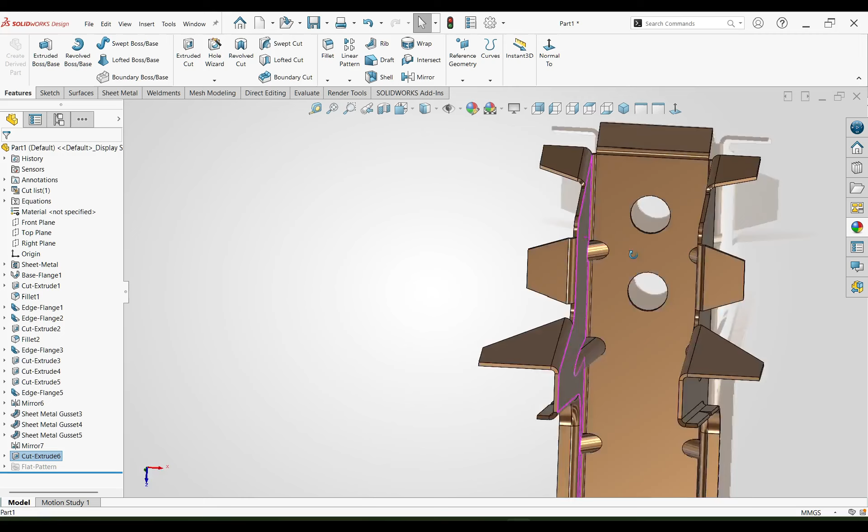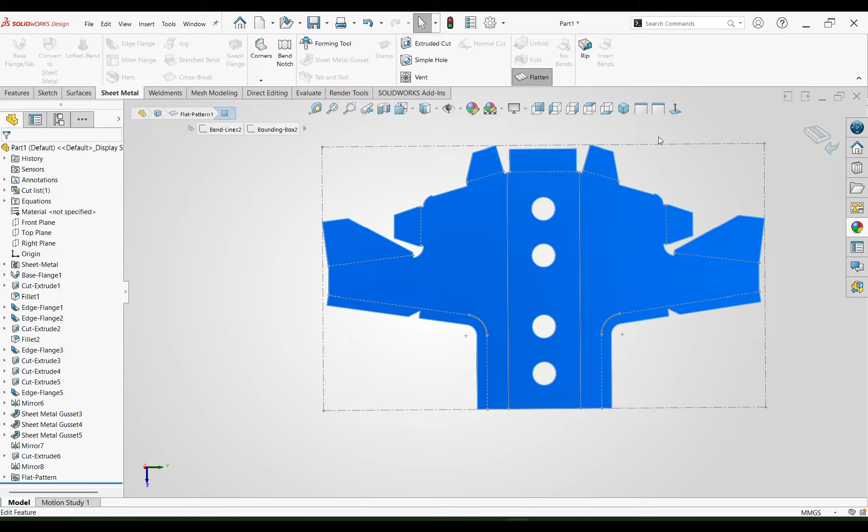In today's SolidWorks tutorial, we are going to design this powerful sheet metal mounting bracket step by step using different sheet metal features like base flange, edge flange and so on. This model looks clean, professional, and it's perfect for practicing real industrial sheet metal design workflow inside SolidWorks.

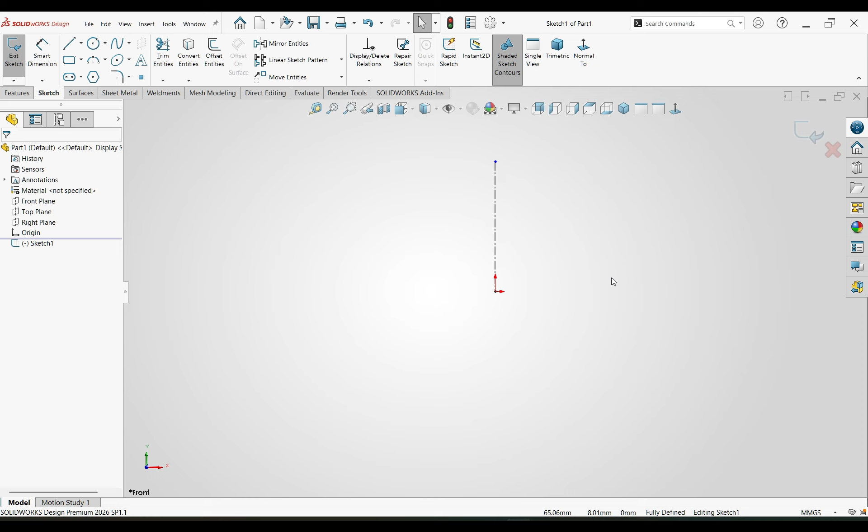Now we will select the front plane. I'm going to use center line, vertical, and make a horizontal line and vertical line. Horizontal will be 30 and vertical will be 150.

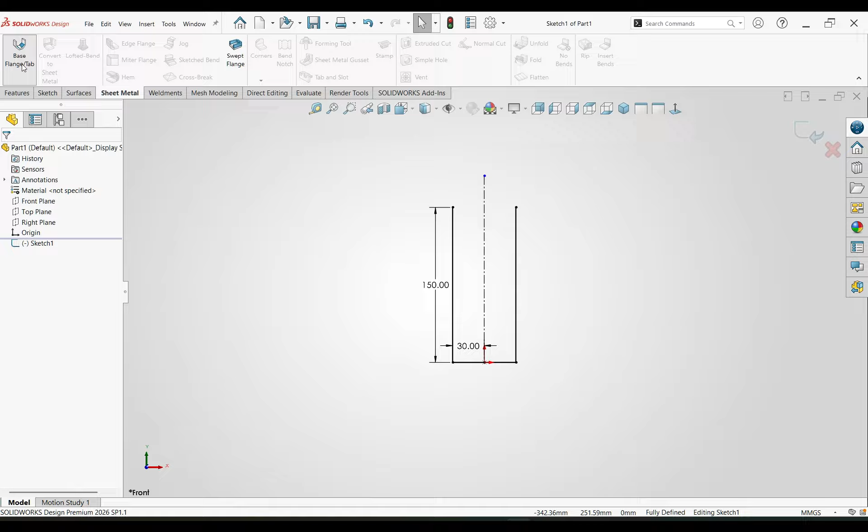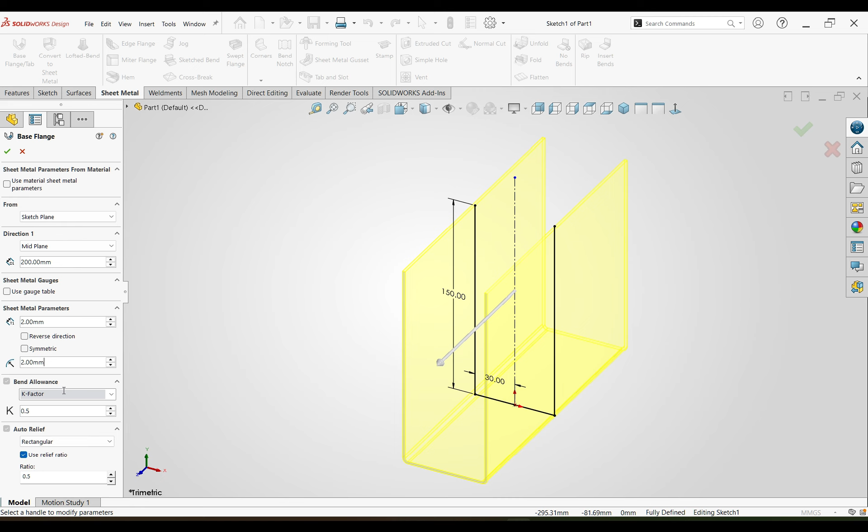Select all, mirror this, go to sheet metal parameters, select base flange, we will convert this into sheet metal. The sheet thickness I'm going to use will be 2, mid plane, 200 mm, and the radius I'm going to define as 3 mm... sorry, 2 mm. OK.

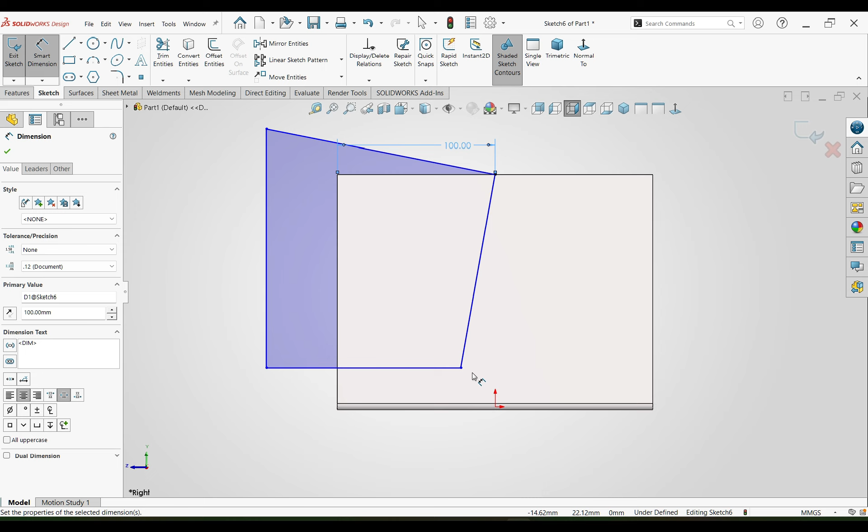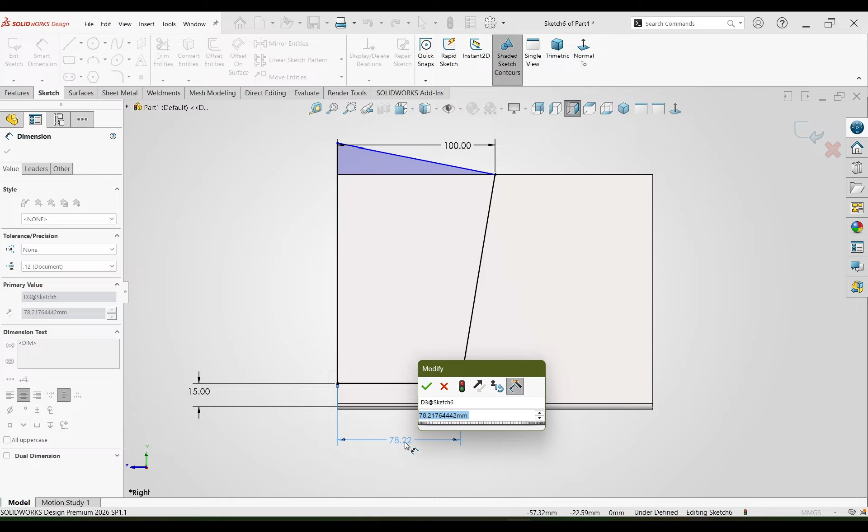Next step we will cut something. Select right plane, we will remove this material, draw a sketch like this, and define this sketch: this point to that point 100 mm, this point to that line 15 mm. Drag this dimension, select this point and this line, make it coincident. Still not fully defined. I'm going to make this line 80 mm and OK.

Select extrude cut, select through all both, and OK.

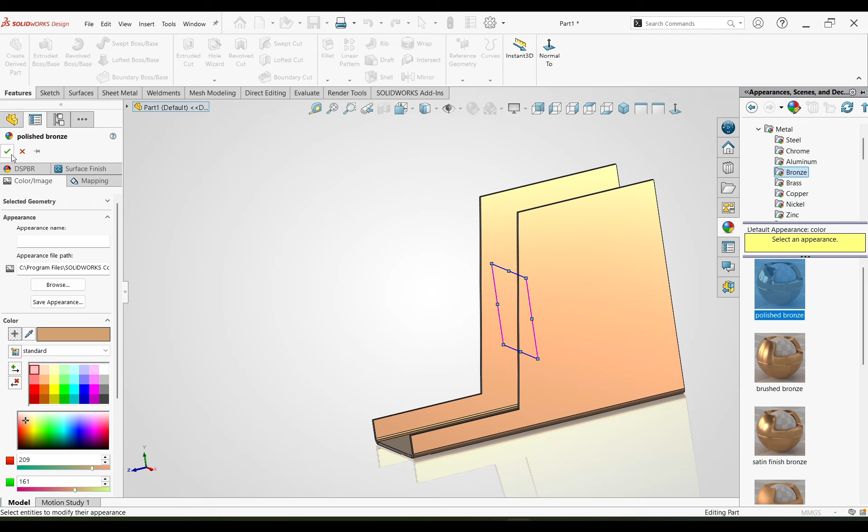Next step, I'm going to assign the material. Go to metal, expand this, bronze, and OK. It looks cool.

Next, we will use the fillet feature. The fillet radius will be 20. Select this edge, that edge, and OK.

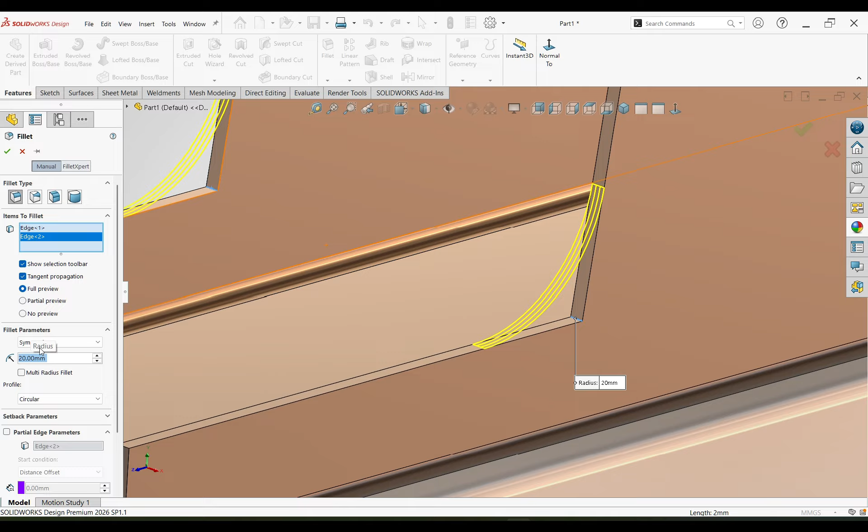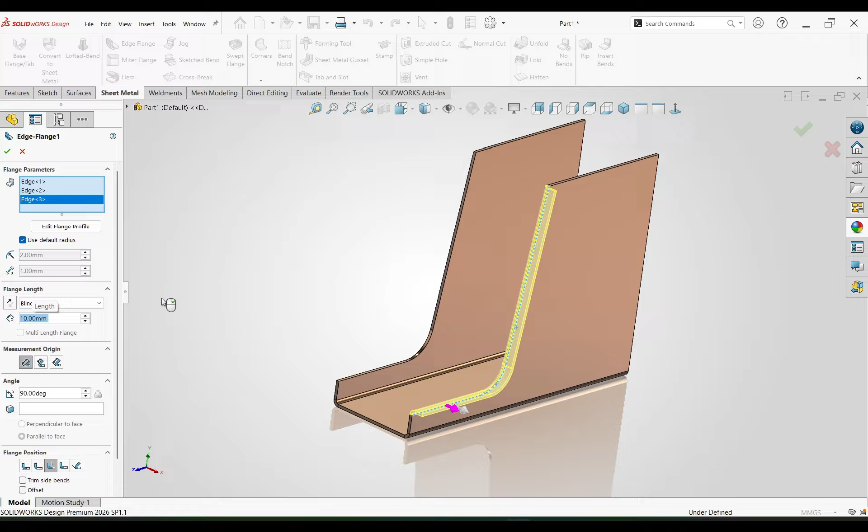Now we will use edge flange. Flange parameter will be this edge and click, this edge and click, and the flange length will be 10 mm. Material must be outside, and OK.

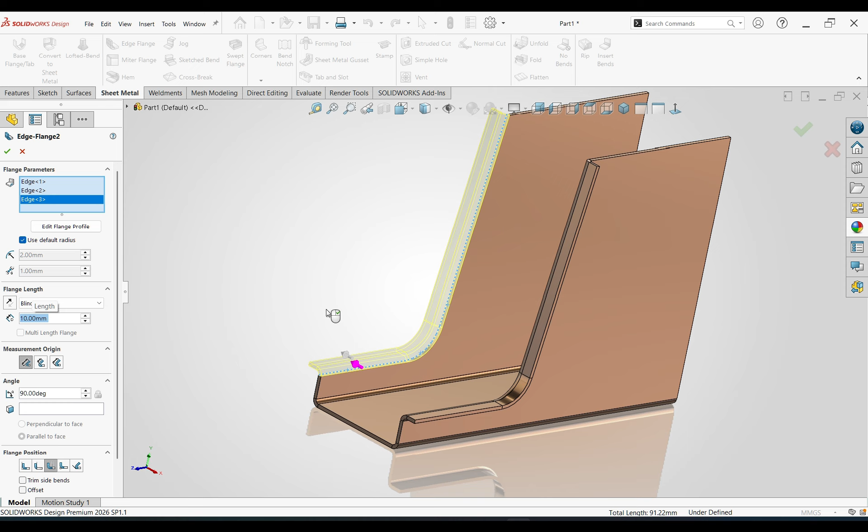Again I'm going to use edge flange. Select this edge, click it, this edge and this edge, and the flange length will be 10 mm, and material flange position outside, and OK.

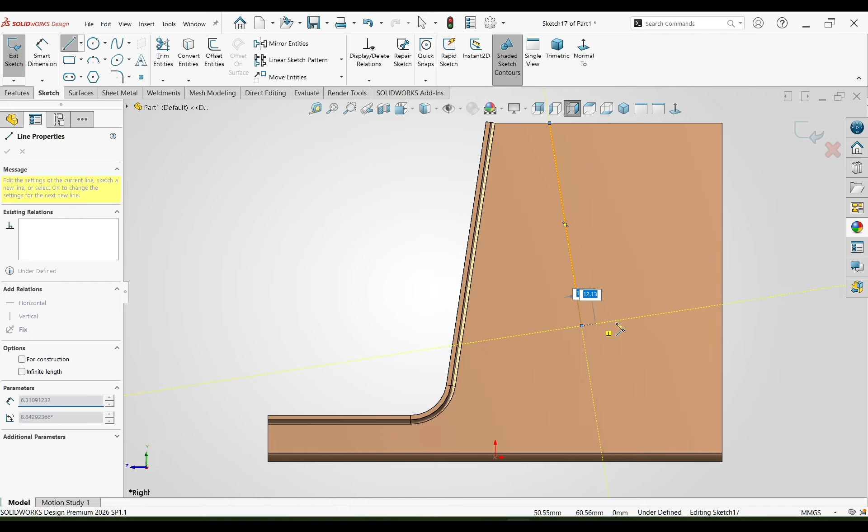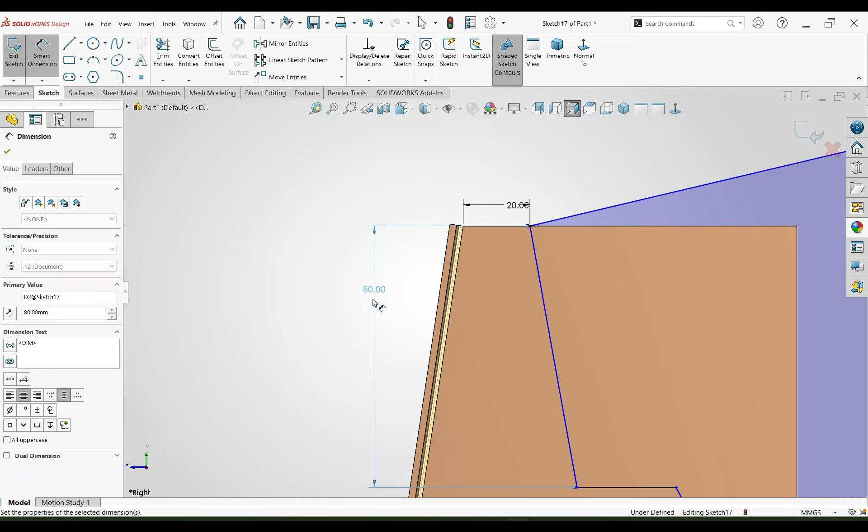Next step we will remove material by using a right plane. Select right plane, draw a sketch like this as you can see on my screen, and then the dimension: select this point and that point 20 mm, and the length will be 80, and this length 50, and this point to the origin point 30 mm, and OK.

We will extruded cut through all both.

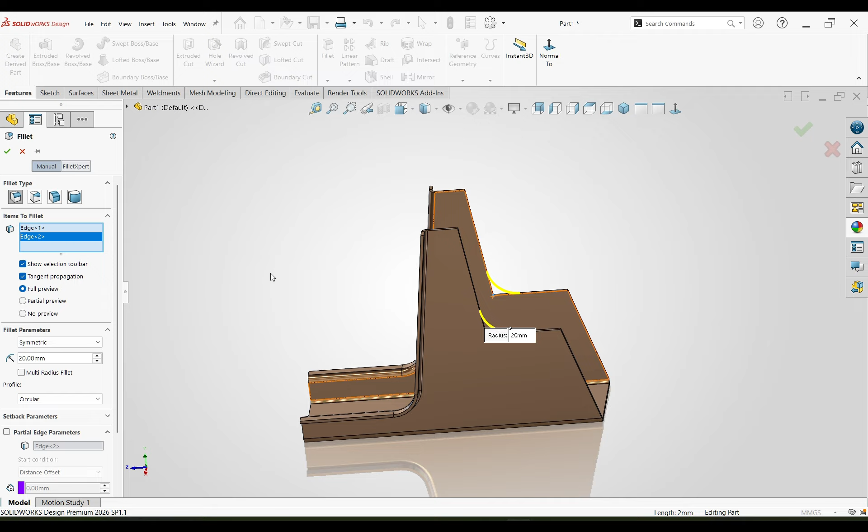Now let's apply fillet here, two corners, 20 mm. Select this edge also and that edge. OK.

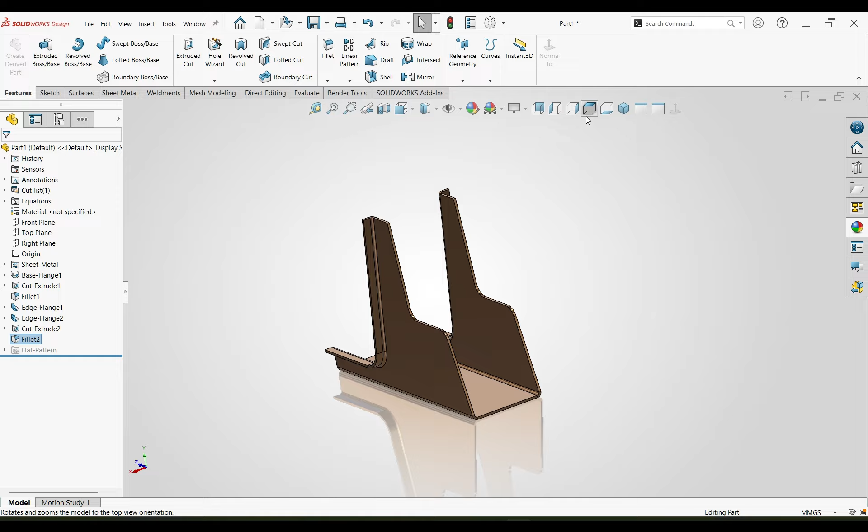Again go to fillet number 2, re-edit this. The fillet parameter I am going to define as 10 mm. Now it looks better. Isometric view.

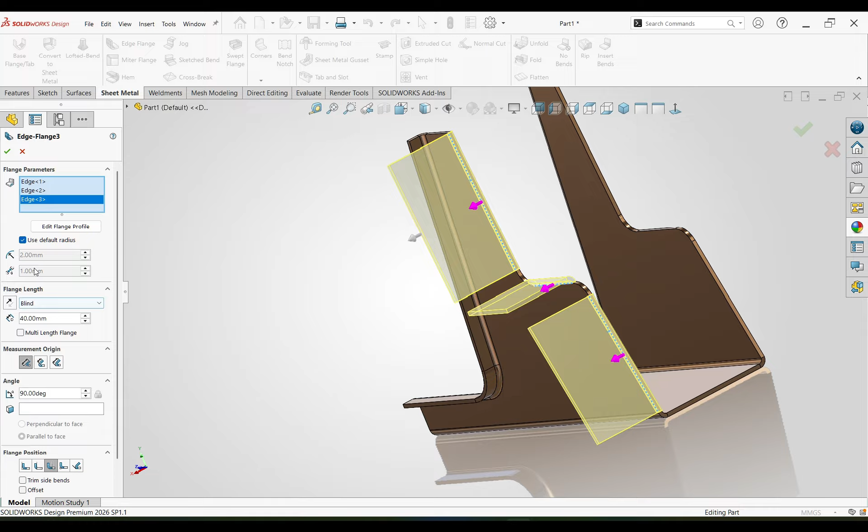Go to edge flange, select this edge, OK, this edge and this edge. Now the flange length I am going to define as 40 mm, and material must be outside, meaning bending outside, and OK.

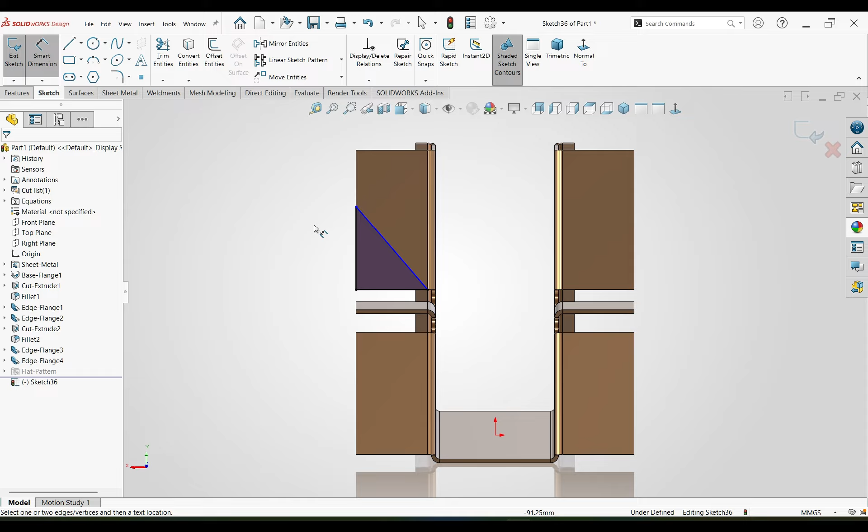Select this face and draw a sketch. If you see on the right side, later I am going to re-edit this sketch, so don't worry about this portion. Follow my steps: select this line, will be 50 mm, hit the S key, and OK. Extrude it through all both.

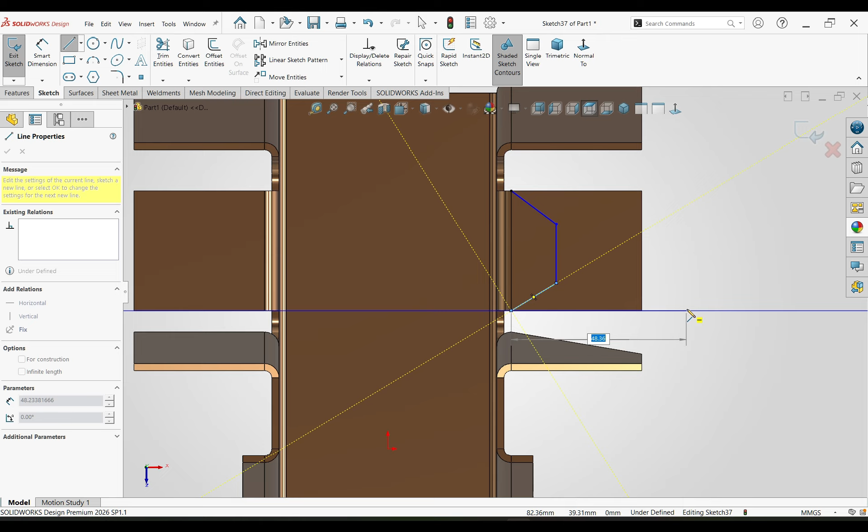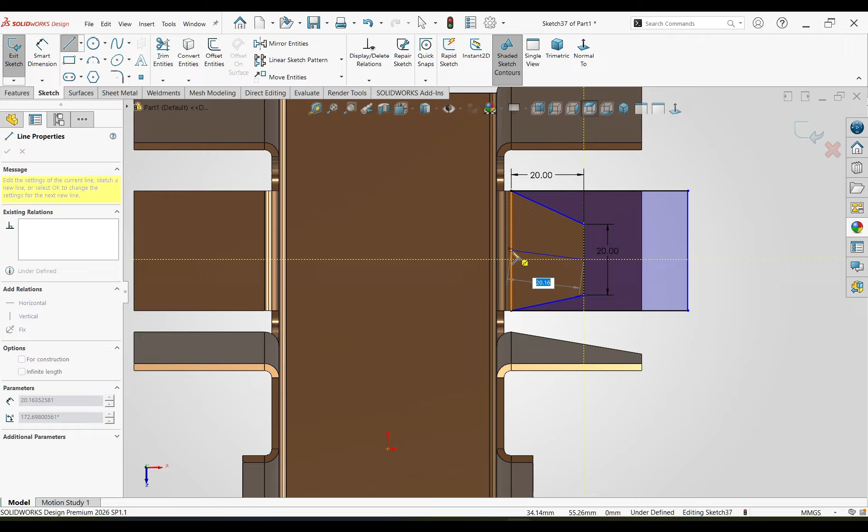Select this second square bracket, normal to, draw a sketch like this. Define that horizontal distance will be 20 and the vertical will also be 20. Now make it symmetry. I am going to use a center line from this to that point, make it coincident and horizontal, and make it construction geometry. Select extrude cut.

I am going to use blind and link to thickness, and OK.

Select this face, draw a sketch here.

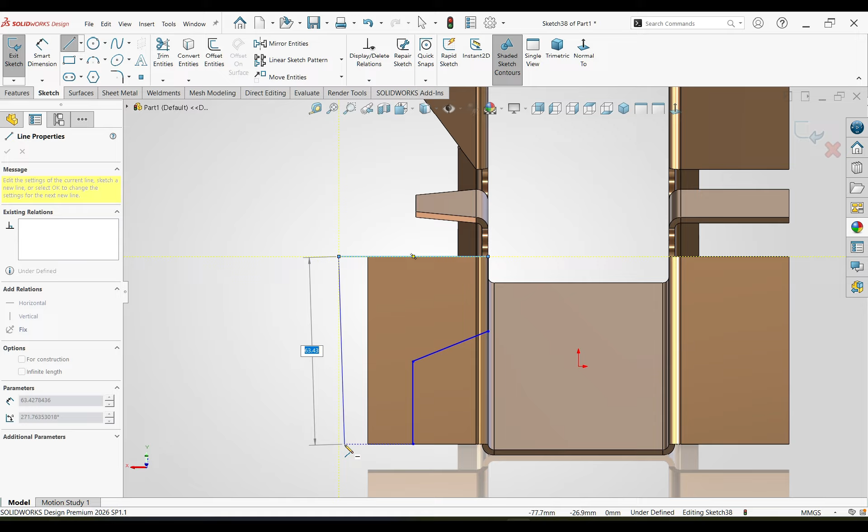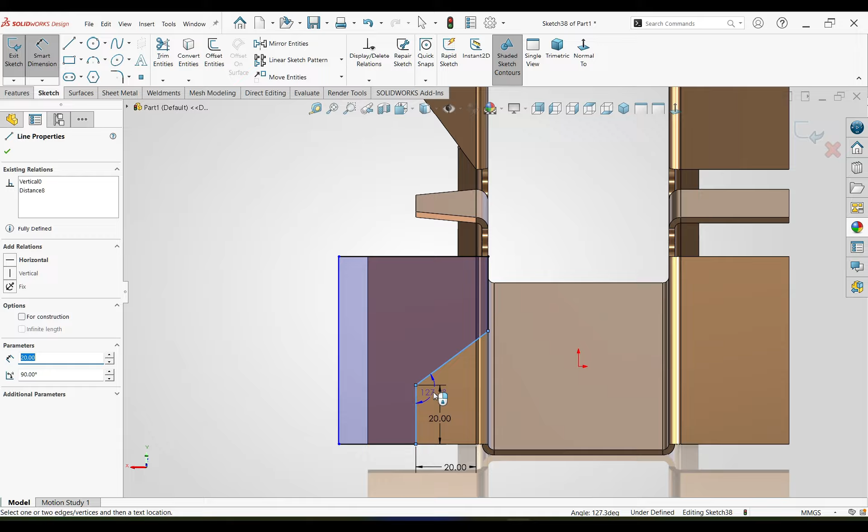Draw like this. Later we will define these lines. This distance will be 20mm, this vertical line 20, and this might be error. The angle is 120 degrees.

Extrude cut, link to thickness. It will not cut properly, so here's what we will do.

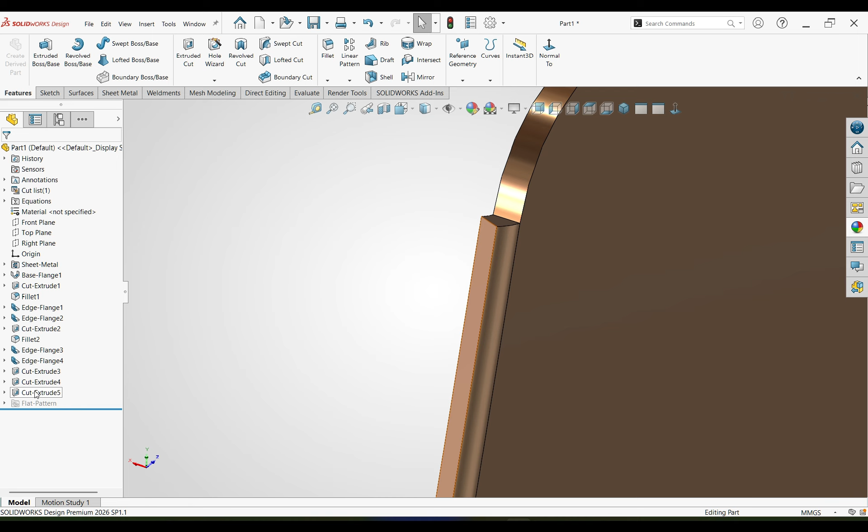Go to extrude cut 5, uncheck. I am going to use up to vertex. Select this vertex and OK. It will remove the material smoothly.

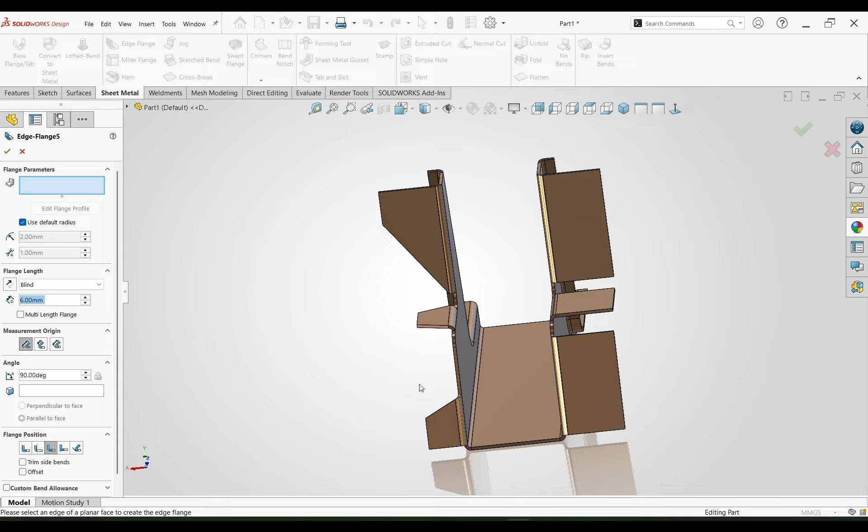Again go to sheet metal, edge flange, select this edge and the flange length will be 40, and the angle I am going to define 60 degrees. Material must be outside, bend outside, and OK.

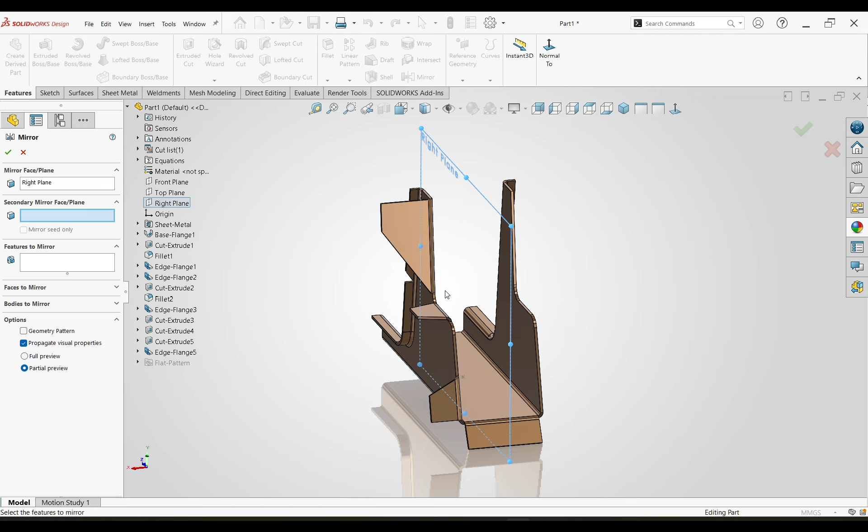Now let's mirror these features we recently created. The center will be right plane and features. I am going to select this flange. Select this, cut extrude 3, cut extrude 4 and 5.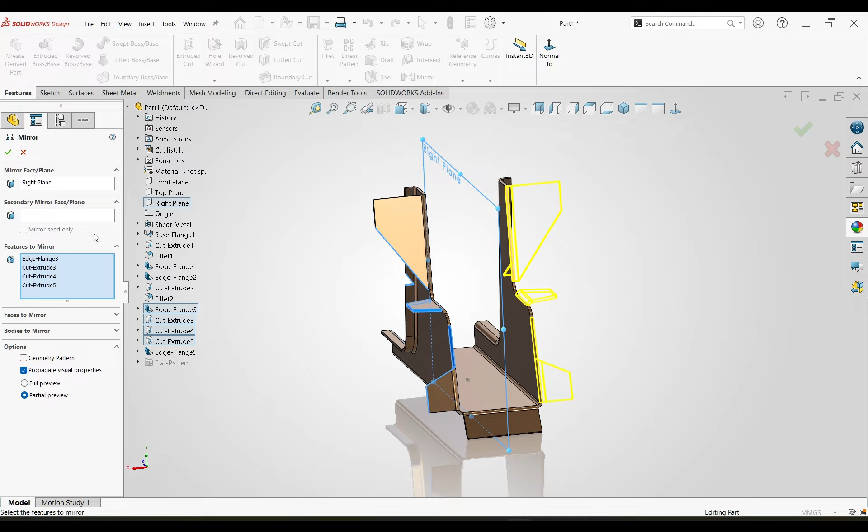We don't need fillet, we already created it. Oops, it's an error. Select geometry pattern, still error. Why? I'll show you. Remove this and OK. Still get error.

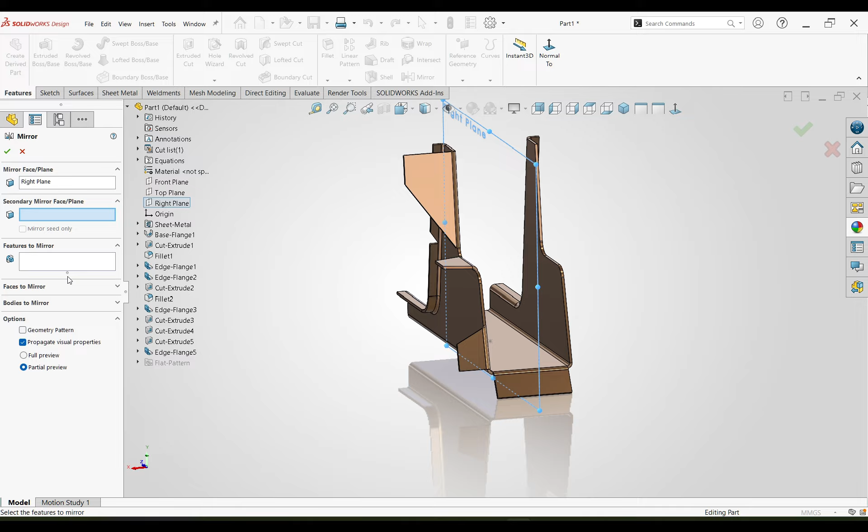OK, select, uncheck. Again go to mirror number 4. Select all the cut extrude. Yeah, it works.

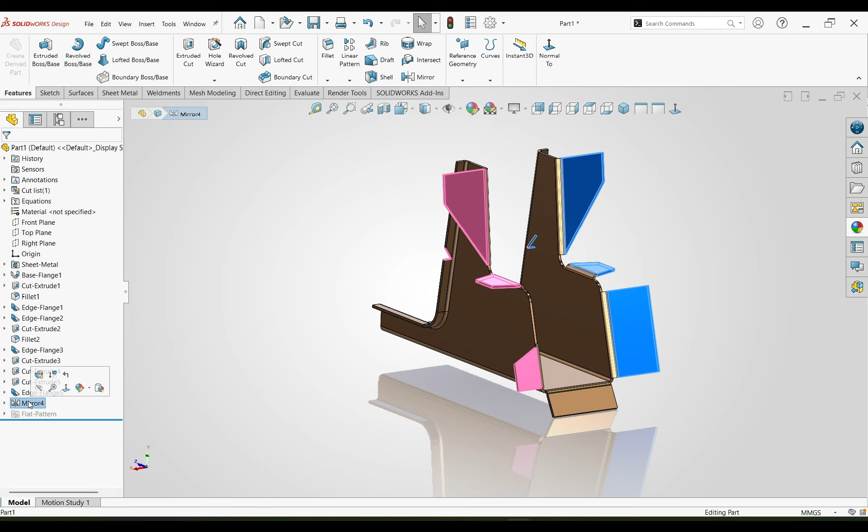If I select cut extrude number 5, it shows a rebuild error. So I have to delete because I used a vertex. So we have to re-edit this portion. I am going to delete this mirror feature.

Again go to right plane, features. I'm going to select this Edge Flange, cut extrude 4 and 5. If I select 5, it shows the vertex used to define the up to vertex end condition is not in the model.

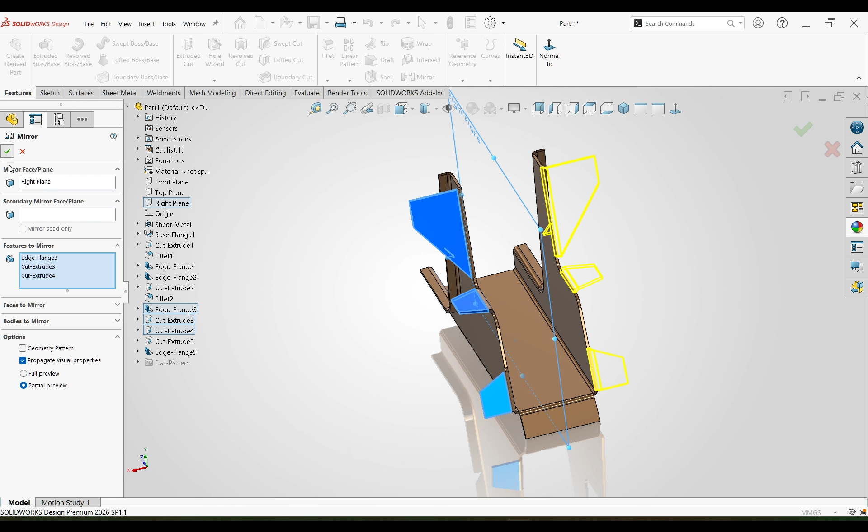So delete this and OK. Again go to re-edit this up to vertex. I'm going to use, let's say, 5mm and OK.

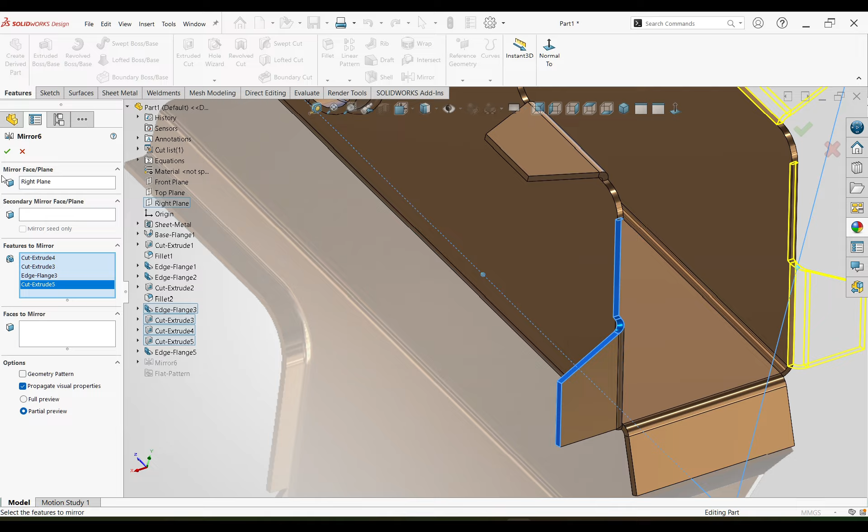Now re-edit the sketch, add this cut extrude 5. It will not mirror if you use a vertex feature.

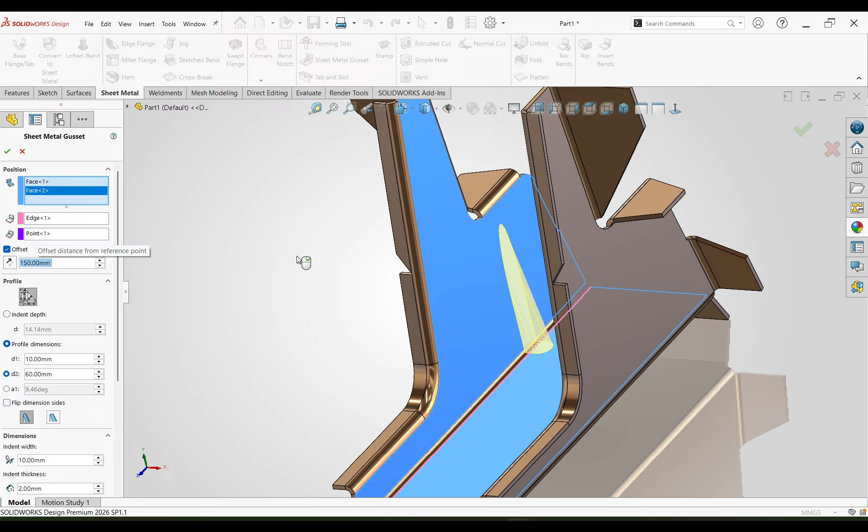Now let's apply gusset for material strength so it will not bend. Select these two faces, OK, and the offset I'm going to define 0mm. It will show the origin point, but I need it at 150mm.

Sorry, the offset will be 100mm. Fine. The profile dimension will be 10 and 60, and OK.

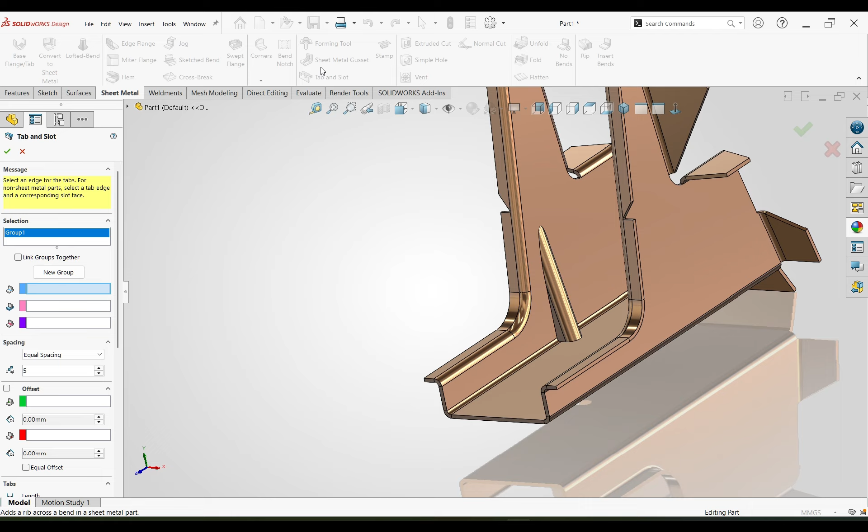Again go to sheet metal gusset, select this face and that face. The gusset distance will be 150mm. The depth will be 10mm and OK.

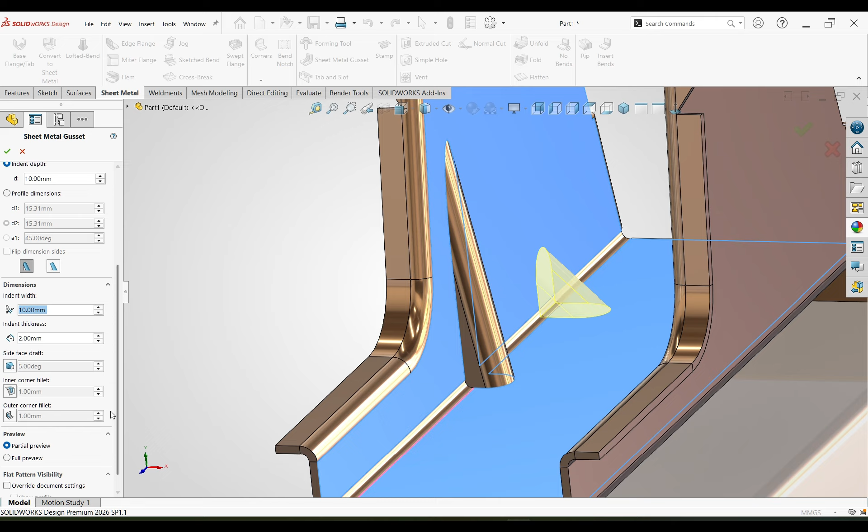The depth will be 50mm. It doesn't look good, so I'm going to define 10mm. Now fine.

Again I need one more gusset. Go to sheet metal gusset, select this face and that face. The profile dimension will be 10 and the offset value will be 50mm, and OK.

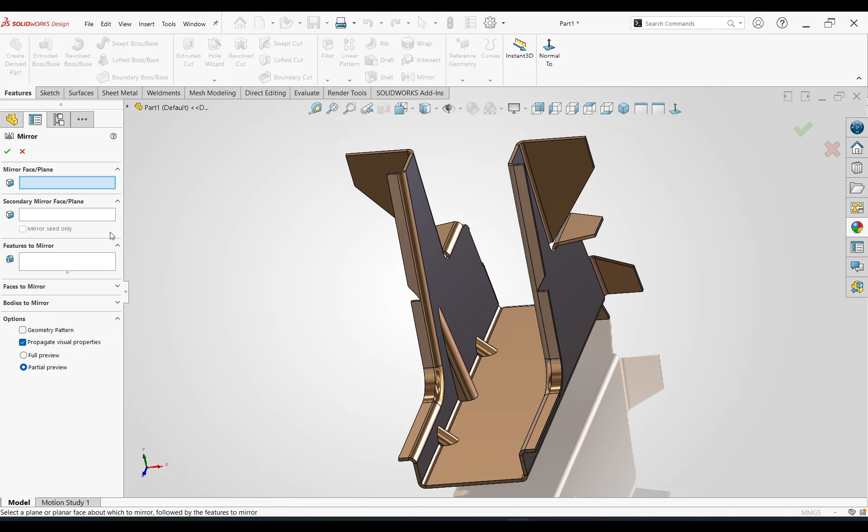Now let's mirror these gussets. Go to feature, mirror. The center will be right plane. Select these 3 gussets and OK.

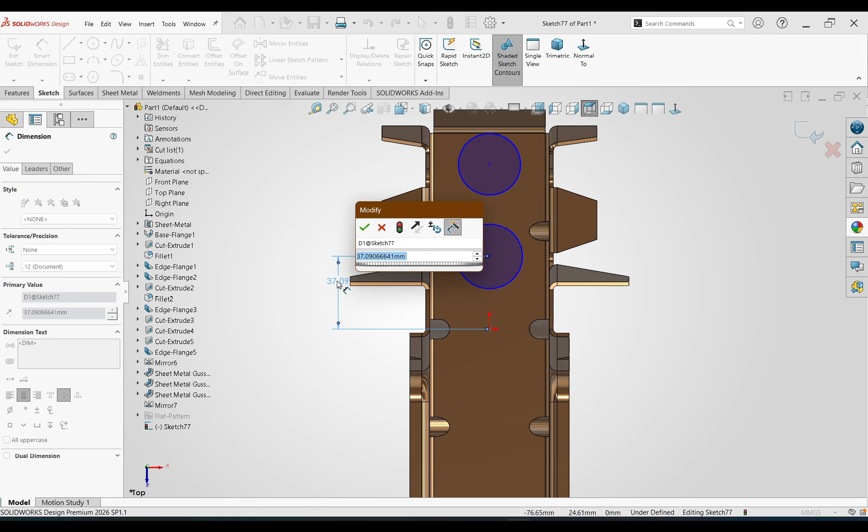Let's create a hole here. Select this face. Draw 2 circles here. Define the distance from this point to that point 30mm, and the hole diameter will be 20.

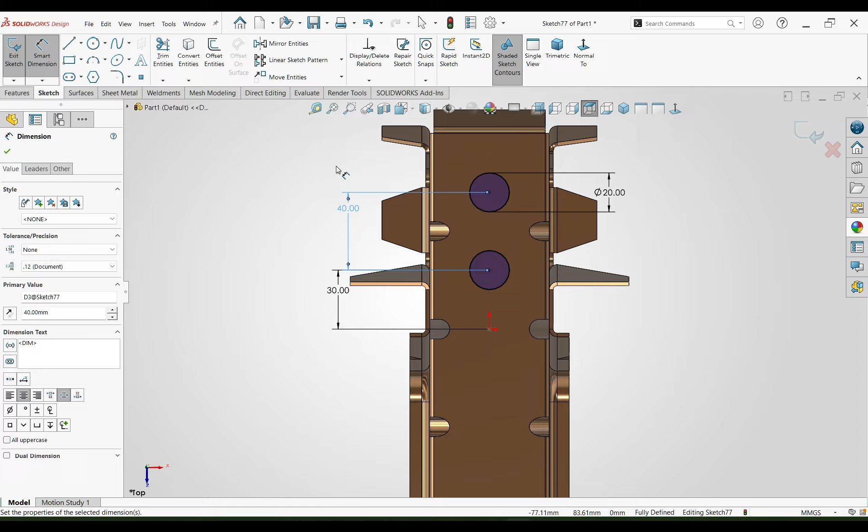Make it equal. Make it vertical, and this point to that point the distance will be 40mm. Hit the S key, extrude cut, select link to thickness and OK.

And that's it, our SolidWorks sheet metal bracket design is finished.

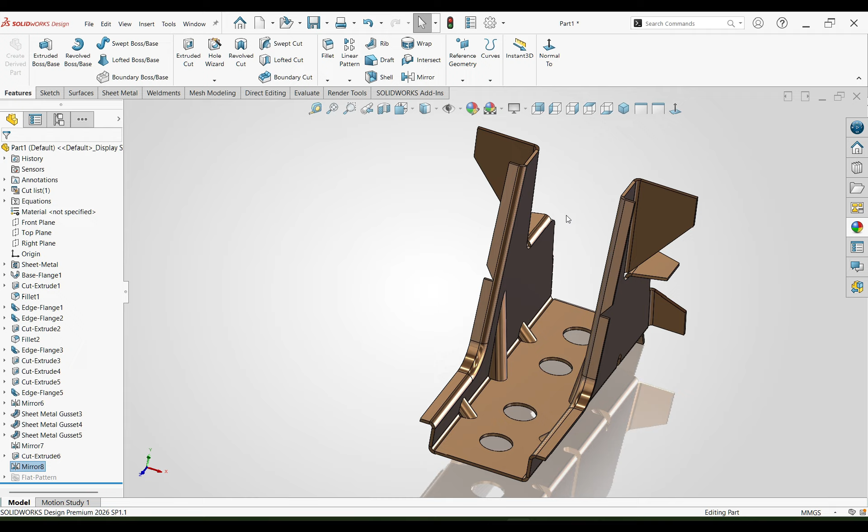I hope you enjoyed this tutorial and learned some useful sheet metal techniques along the way.

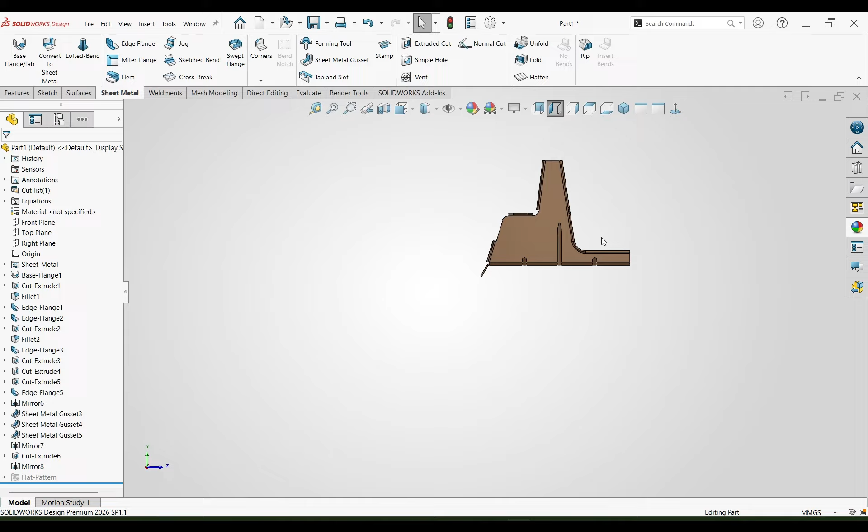If I select flatten, it will flatten. It means it's ready for manufacturing. Send this file as a DXF file to the sheet metal laser cutter.